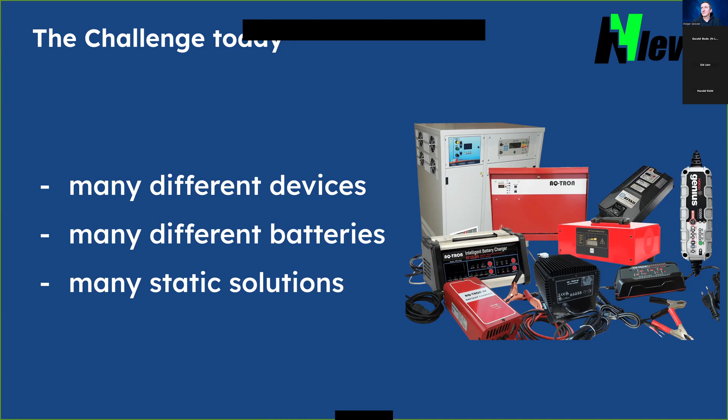To get the right currents from batteries, usually a lot of electronics is used, also in the private sector. So we are facing a bunch of different chargers for static applications, and all the companies are time intensive in developing these devices.

We use batteries for all things we do all day, like mobile phones, mobile transportation, even vacuum cleaners contain batteries now, or you use a vacuum cleaner while charging your EV. What happens if we can use an app to get the right current from a battery pack anytime we want, only per app? No power electronics is used, there's no conversion, and you can get any type of current you want, use any type of battery, and even repair and upgrade the system while in operation.

Customers are using the N-Level system, for example, for uninterruptible power supply. They reuse all their old batteries and scale up the system, which is really easy to scale because you have a virtual layer in it.

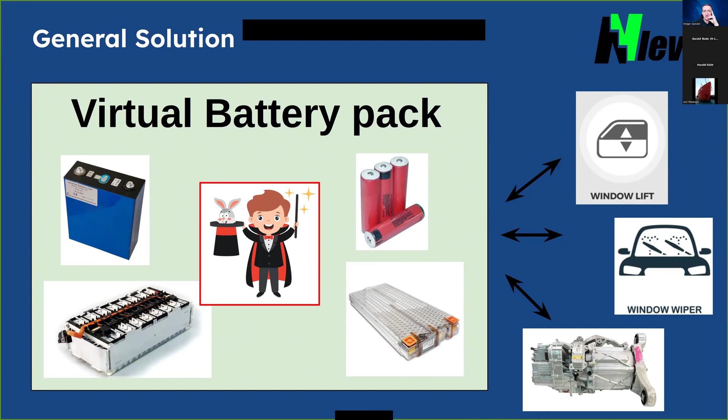But how do we do it? We have so many requests, and virtual battery is the general answer. The virtual battery is the software layer on top of the batteries, so we adapt the chemical cells to your current. You do not need to care about the chemistry anymore. And how are we so fast in adapting, especially for multiple currents at the same time? So charging a mobile phone and driving a microwave, this is done by our patented N-Level algorithm.

Today, we are looking for investors and development partners to apply and adapt our technology. Now I'm open for Q&A questions. Thank you, you're perfectly on time, exactly 4 minutes. So, any questions for N-Level?

There you go. Yeah, from me, Christian Hoffmann. I would like to know if you are considering battery cooling as well. We do thermal management by switching and directing the loads into dedicated cells, so it's active power sharing. Okay, thank you.

Any other question? In the meantime, I will share the link so that you can contact him directly. Hold on, I shared it to the wrong person currently. Oops, let's send it to everybody. Here we go, there's the link to contact him.

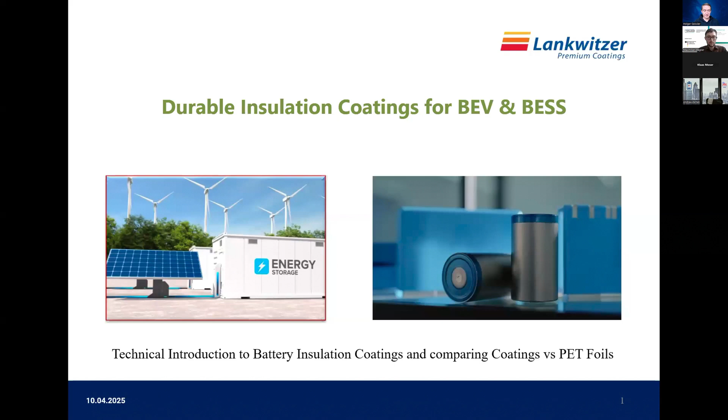Let's see, why can't I change here? What we're going to look at today is basically the difference of durability between PET film, which is used very commonly on battery cells, whether cylindrical or prismatic cells. If we look at the throughput of PET film for the application, it's 6 parts per minute. Insulation coating, 60 parts per minute, so quite fast.

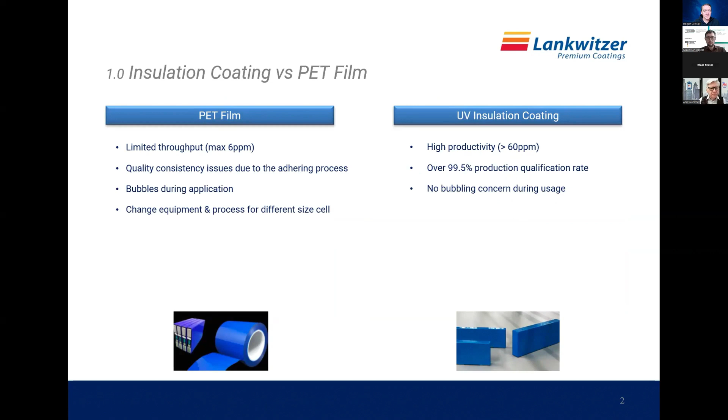If we look at the issues we hear from the market and see in the market about the adhering process, there is 99.5% production rate with insulation coatings, so no failure. Bubbles during application of PET film, of course on coating, not existing. Change of equipment for different cell size, not necessary for coating. You can use different type cells, different size cells, through the same application equipment. Wrapping process is not easy to handle all the time, and the coating process is fully automated.

The adhesion of the film against the can surface is normally very low on PET film. It's very high on UV insulation coating. We're going to look at this in the next slide. Poor vibration and friction performance, that's super important for cars, it's important for trucks on challenging roads in various parts of the world. Long-lasting protection, the target for us now is up to 25 years, and significantly better thermal conductivity.

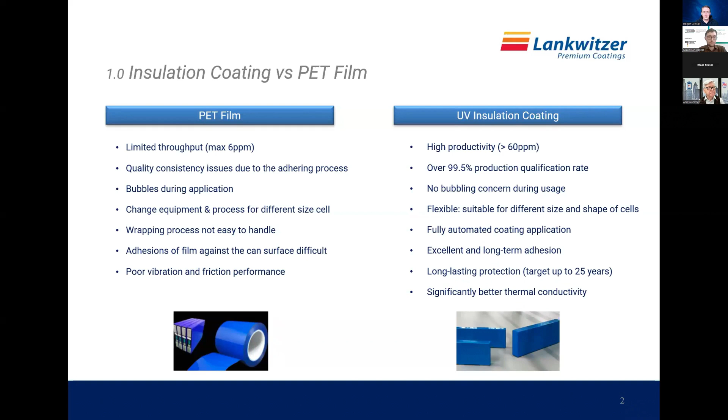So that's a rough overview. PET film to the left, UV insulation coatings to the right. This is the main topic and the major advantage of the coating, the insulation coating. If you do a test, it's called a lap shear test, so you coat 2 cells together or 2 panels together and you rip them apart. And it's always the glue failing - there is never any bare aluminium underneath which comes up.

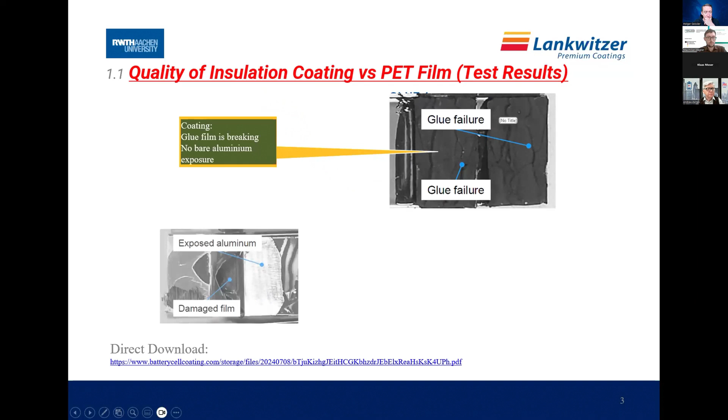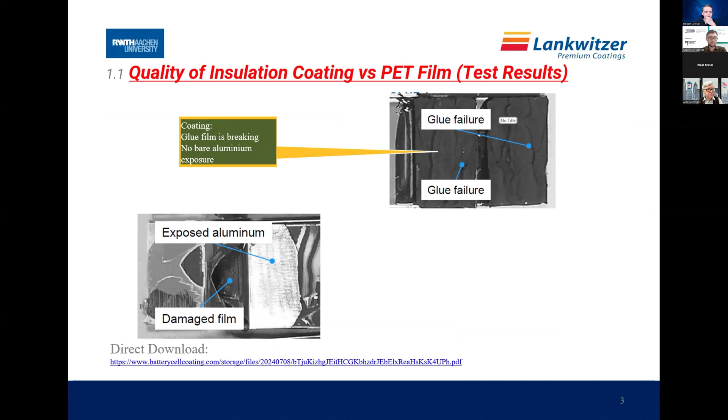If you look at the PET film, the PET film is always ripping off the battery cell and leaves bare exposed aluminium on the outside, which of course is very tricky if you have coolant, as it generates corrosion. So this battery cell will not last very long anymore.

The reason for this, and now we're getting very technical, is that on the coating we only have one glue film. It's the glue film in between the 2 coatings. You glue the battery cells together in the battery packs. You have one glue, and you've got another coating film, and you've got another cell.

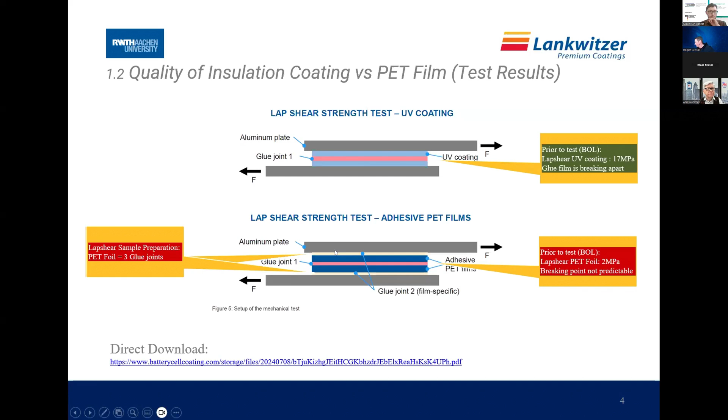If you look at the PET foil as an example, you have normally three glue joints. You've got the battery cell, you've got the foil, then you've got the glue, and then you've got foil again, and then you've got a glue film again. And it's this glue film here which is normally damaged due to vibration, due to movement, slight movements in your pack. It's always damaged in this area between, and leaves bare aluminium open.

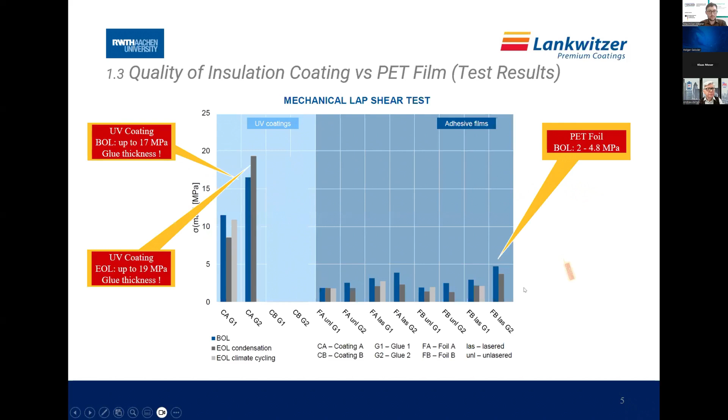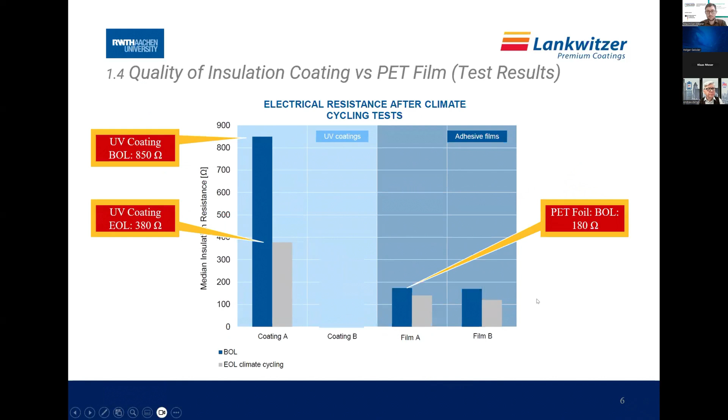And I believe this is it. This is where we are: Germany, China, Mexico, and India. This is it. Thank you very much.

Oh, that was quick. Yeah, 4 minutes run by fast. That is true. But thank you very much for the interesting overview. Maybe first question, it sounds like the coating is so much better than the PET isolation or insulation.

Do you have some numbers, like how many batteries are actually produced by this coating technique compared to the PET films? Up to now, we have produced about 800-900 million cells for one big car maker in Germany. We are now starting for a big car maker in Sweden with similar quantities, and so on. Everybody who does this comparison between PET film and coating is moving towards coating. Lots of activities in India with various companies, lots of activities in Europe with cell manufacturers and OEMs.

So at the moment for us, it's full blast converting to insulation coating. That sounds very promising and a growing market. And massive. Yeah, in batteries, there is so much innovation still to be implemented in the batteries produced right now. It's very inspiring to hear that.

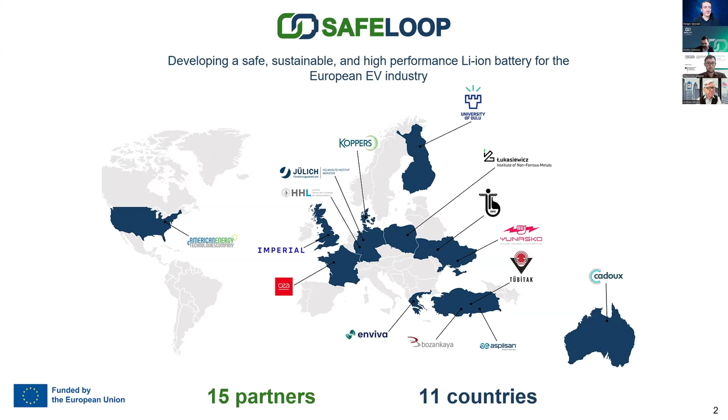The situation at the moment is that within the next 5 years, the world should expect to generate approximately 2 million tons a year of wasted lithium-ion batteries. The estimate varies depending on the source, but this is the approximate scale of what will happen soon.

And there is an opportunity. First, we could improve the unit economics of lithium-ion batteries by recovering some of the rare active components that are expensive, and reusing them inside of a recycled battery.

The second opportunity is more like the need to follow European Union regulations. By 2030, 70% of lithium-ion batteries should be recycled, 95% of cobalt—a very rare and politically sensitive material—and 80% of lithium, which is difficult to recover from the battery. They should be recovered by law.

And so this offers a very interesting situation where companies should think about how to reorient themselves and really utilize recycled batteries inside of their products.

The problem, however, is not really only the recycling process—how do we extract these materials? The really difficult issue is how do we manufacture a recycled battery cell which has a competitive cost. It's not very expensive, it has comparable performance to non-recycled battery cells, and it doesn't blow up when you turn it on, because after the recycling process, we never get ideal or perfect active materials.

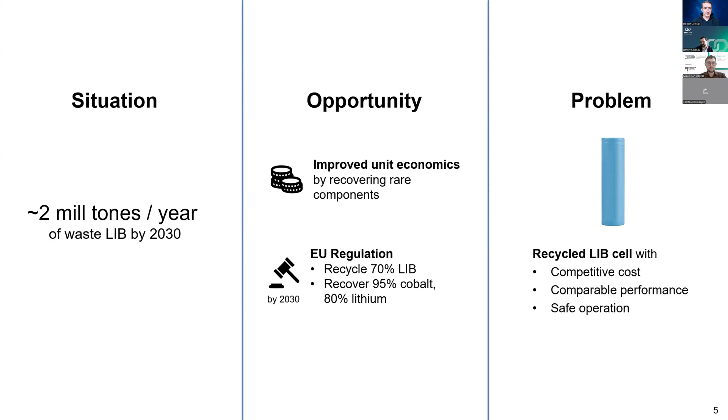They get damaged during the process to a different degree, and so designing a battery chemistry which actually takes into account all these issues is important. This is what SafeLoop, as a consortium, is trying to do.

So on the cost-effective side, one of the project partners... could you please turn on the microphone?

Thank you. So one of the partners develops novel direct recycling technology. This is a really safe and careful method of extracting active materials without creating any slurry.

On the performance side, to ensure that the chemical performance is enhanced, some of our project partners develop novel materials, adding different additives and nanoparticles to really enhance the chemical performance.

And on the safety side, we developed a novel non-flammable electrolyte formulation. Together, this combination of solutions, we hope, would lead to a more stable, safe, recycled battery cell.

So as soon as these elements can be produced, and project partners from SafeLoop in different countries develop these technologies, the desire and hope of HHL here in Leipzig and Saxony is to transfer these technologies into Germany.

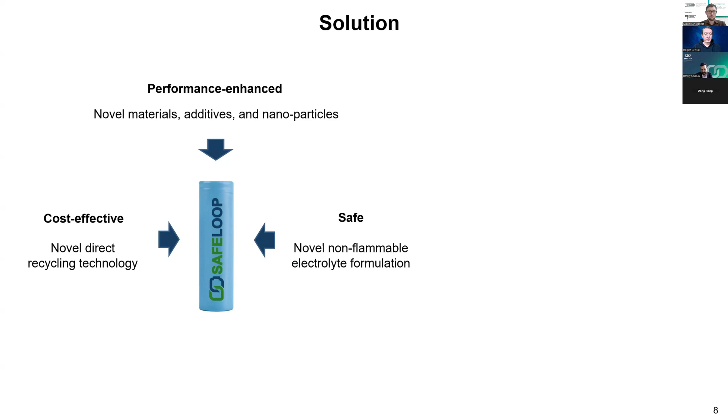And developing, let's say, a facility which uses these recycled battery cells in the battery pack, and really, through a circular business model—maybe through leasing of the battery pack, or maybe through other ways of developing a circular relationship with operators of battery packs—on a permanent basis, integrates the battery pack, removes it, then disassembles it, replaces the cells with new recycled cells, and keeps the battery pack in operation.

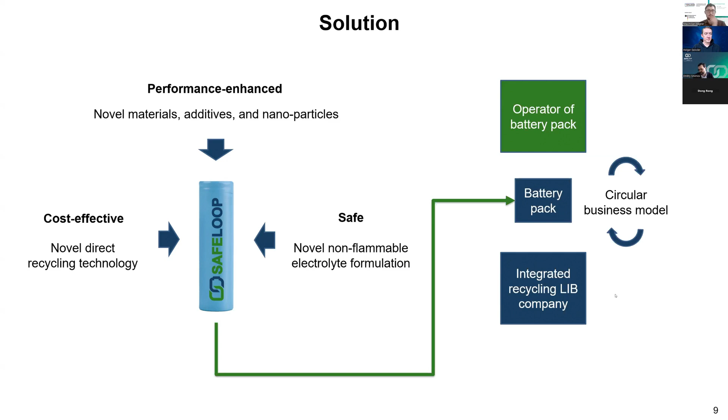And so what we at HHL hope to achieve is to build, in the long term, this organization—an integrated recycling lithium-ion battery company. For that, I would like to invite those who are interested in pilot studies with the recycled battery pack to contact me.

This is a long-term strategic project, but we will be very interested to establish this relationship up front. Also, just a little comment: those of you who manufacture or supply EU-made cathode materials, please also reach out. Thank you very much for your attention.

Thank you very much. A little bit over time, you have to leave some time for the questions, but yes, I couldn't agree more—the recycling of batteries must start with the production. And I think we have already the first question, so please go ahead.

Just wanted to ask whether there are any LCA studies being done to really look at whether this is actually beneficial. I'm asking because I come from the plastic recycling side of things, and while people come up with new methods, it's usually not beneficial for the environment to do some of these things. I just want to know. I'm not from the battery field.

Yogo, thank you very much for this question. We have a partner from Imperial College who is working on life cycle analysis, and at this stage we are analyzing whether it makes sense economically and environmentally. Our assumption from the literature, from limited cases in the world, is that under certain conditions recycling makes economic sense with proper organization of the recycling process. For example, using direct recycling methods, which is challenging, but we still need some innovation in direct recycling. Yes, it's possible also to reduce the environmental influence.

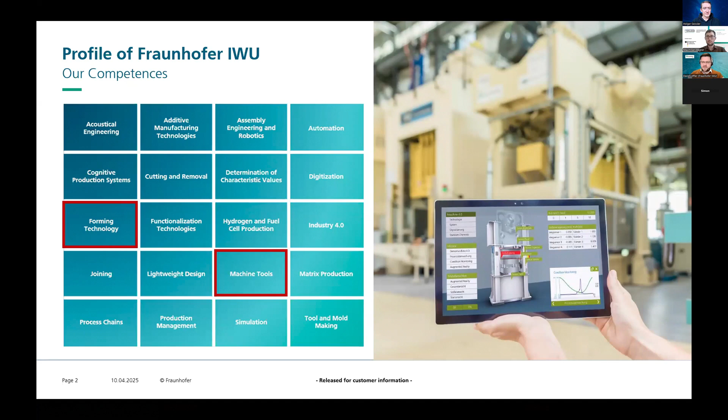If you look at our competences, you will find machine tools and forming technologies, but many, many more. Our different competences far exceed what the institute's name may suggest, and this is also true when it comes to applications. In the field of battery systems, we focus on module and system level, but there are also some activities on cell level, for example forming processes for cell housings.

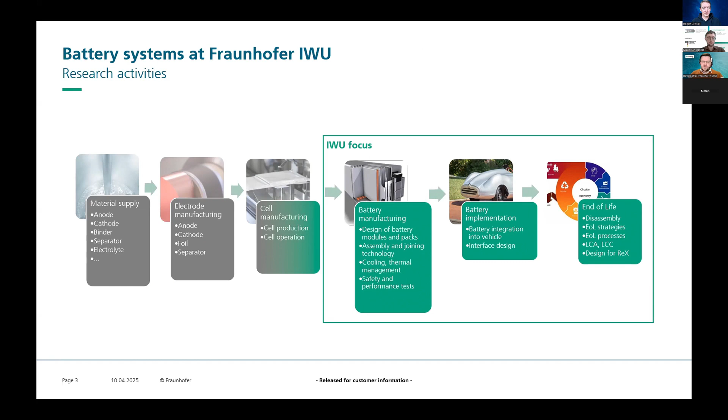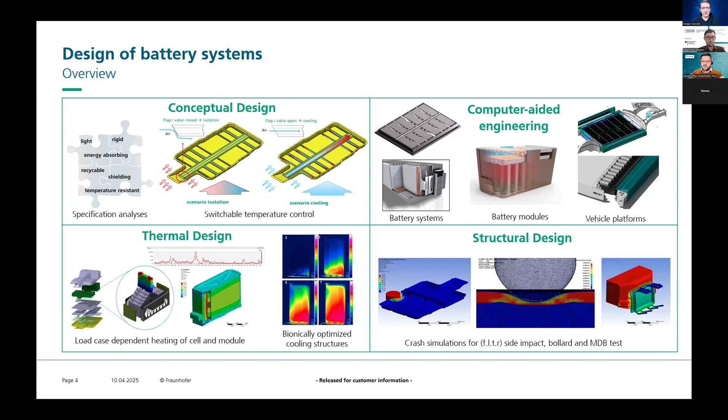The implementation and end of life of battery systems is also a very important field of research. When building our battery systems, we already take end of life processes into account and design the systems accordingly. In our projects, we can start at different stages of system development. For example, we can start at a white sheet of paper and create concepts tailored to the requirements of the given application. Then we bring our concepts digitally to life and optimize the thermal and mechanical properties simulation-based. We also build physical demonstrators and prototypes, and to verify the simulation results we have a large number of different test stations where we can perform tests on material, component, and system level.

Especially for traction batteries, we have different bollard tests where we can adjust the geometry of the bollard as well as the impact energy by height and mass.

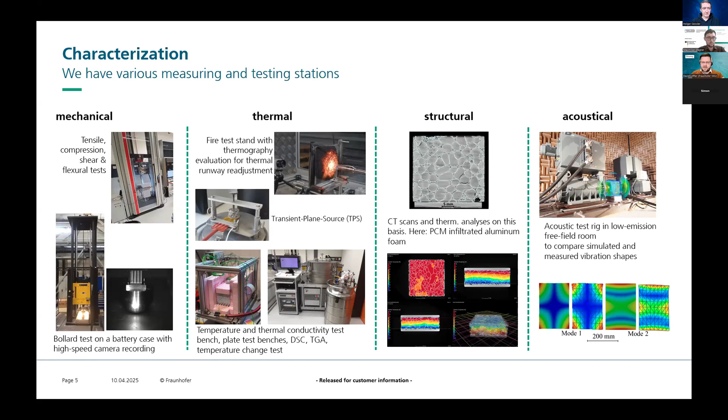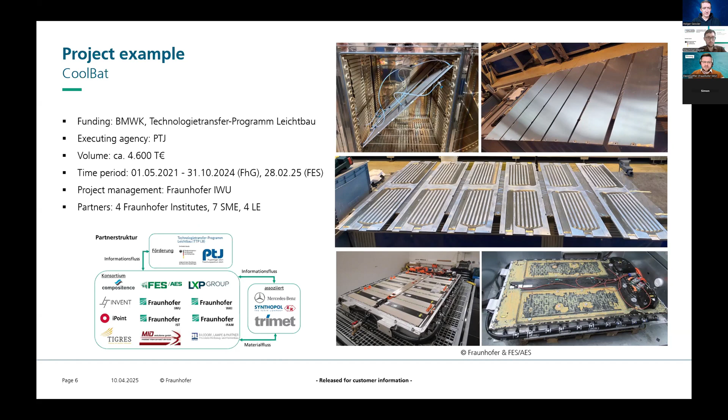As an example of a project, I brought the CoolBat project. There we rebuilt the EQS battery housing with many innovative components. One of the tasks was to improve the floor panels, and here we used aluminum foam sandwich structures infiltrated with phase change material for passive temperature control, which reduces the energy consumption of the temperature control unit. Most importantly, this is an investment project funding the build-up of a research infrastructure for the automated dismantling of traction batteries.

Here you can see a very first concept. With this system, we will be able to disassemble complete traction batteries and develop the corresponding processes for automation. The goal is to dismantle complete battery systems fully automated from pack level to cell level. So even though the focus is disassembly, production and assembly processes can also be taken into account here. This unit will be operational by June 2026.

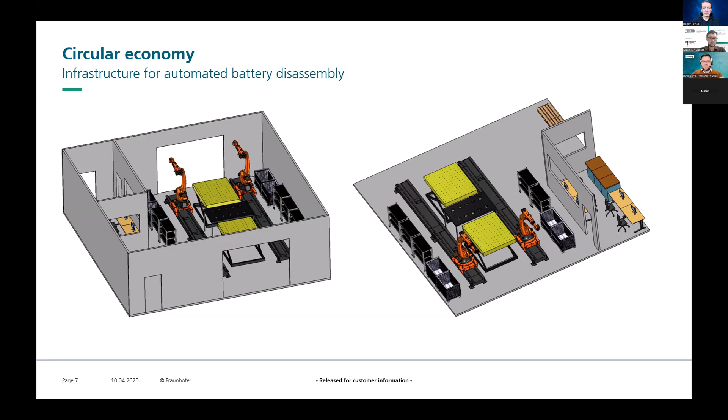There are many more processes and technologies that need to be developed in this area, so now is the best time to get in touch with us and be part of this circularity battery future. Feel free to contact us, ask for the slides, ask for a meeting online or on site, or visit us at our open house in September. Thank you.

Thank you very much, and yeah, perfectly on time. Maybe a quick question to begin: when you have a battery stack, how long does it take to disassemble it completely to the cell level?

We do not really take cycle time into account right now. This station is for developing the processes to show that it is possible to automate or fully automate disassembly of battery systems, so cycle time will be a thing for the future. As it is a standalone unit and not a dismantling line, it will take quite some time, I think. I can't say any specific number right now.

All right, thank you. Are there questions from the audience? Yes, I see one, Dimitri. David, thank you very much for the presentation. A quick question: do you differentiate between battery cell types, like cylindrical, pouch, prismatic, for your automated disassembly system?

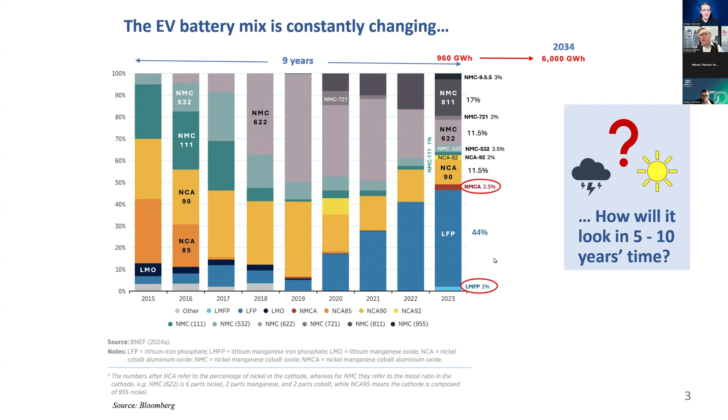To start with, the pie will be much bigger. At the moment we are talking about 1 terawatt hour of batteries produced; in 10 years it will be 6 times as much, possibly up to 9 times as much. So the pie will be bigger, and each slice of the pie will also be bigger. I'm drawing your attention to 2 particular technologies circled in red: NMCA, which is the Tesla battery with manganese, and also LMFP. At 2% each at the moment, they just registered on the radar for the first time in 2023, but they are going to grow big.

So if you look at other battery metals, they all face some difficulties. There may not be enough class 1 nickel, and the price is volatile and may go up to 100,000. But there is a choice — you don't have to do nickel. You can go LFP or LMFP.

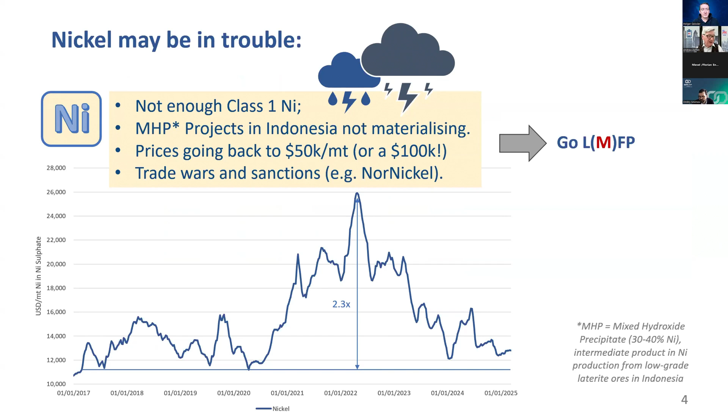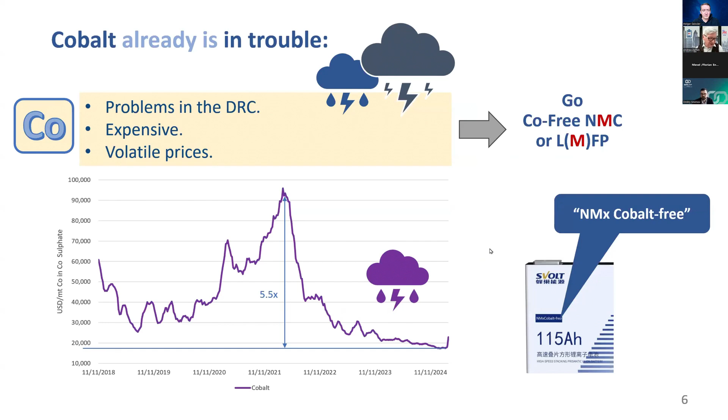Cobalt is already in trouble because it's a victim of its own success, and the reason is it comes from the Congo, and the price is volatile and so on. So it's all under some kind of threat.

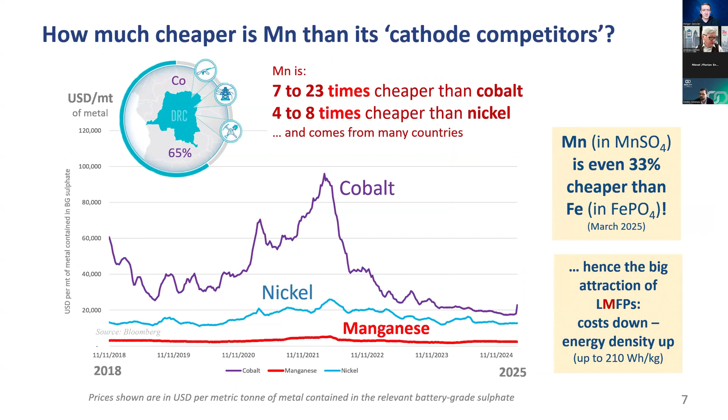If you look at the prices of the three main metals — cobalt, nickel, and manganese — put on the same scale in dollars per ton of metal contained in the sulfate, you see that the other metals are very volatile. Manganese hardly registers on this screen, and it's cheaper many more times than cobalt or nickel. It's the only battery metal which grew in price over the last 15 months compared to other metals.

And it's also technically very viable. Almost every OEM, car maker, battery maker, chemical maker like BASF or Umicore — they have a huge portfolio of batteries, both in production and in design, containing manganese. So manganese is very much the metal of the day.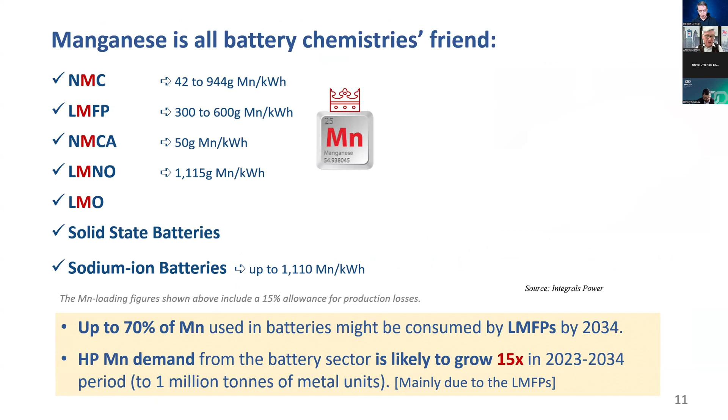The battery packs are going to go bigger, from about 50 to about 140 kilowatt hours. It's everybody's friend — it goes for solid state, goes for LMFPs, goes for NMCs, and so on. And I expect it to grow about 15 times over the next 10 years. And it's produced everywhere, but there is a fly in the ointment, as we say in English.

The majority of it is processed in China. So mining everywhere, but processed in China. So we need more projects outside of China. And if you need more information about this niche product, but very important for the battery market, you're welcome to come and ask more questions. Thank you.